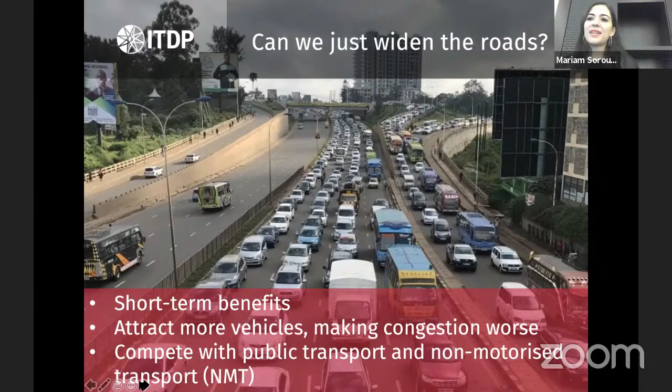First of all, it's all about road safety. There are 90,000 pedestrian and cyclist deaths in the Africa region alone. The cost of road crash fatalities and serious injuries are huge, representing around $128 billion. Can you imagine the amount of money that road safety is costing us? Of that, around $50 billion is attributed to poorly designed NMT facilities. So we would really save lots of money if we started investing in NMT.

Next, user expenses. Can you get back one slide?

We have found that the annual cost of cycling ranges between $200 to $400. By comparison, if you have a car, the driving expenses would cost you around $3,000 to almost $10,000. So the cost of having a cycle and investing in a cycle is really cheap compared to having a car.

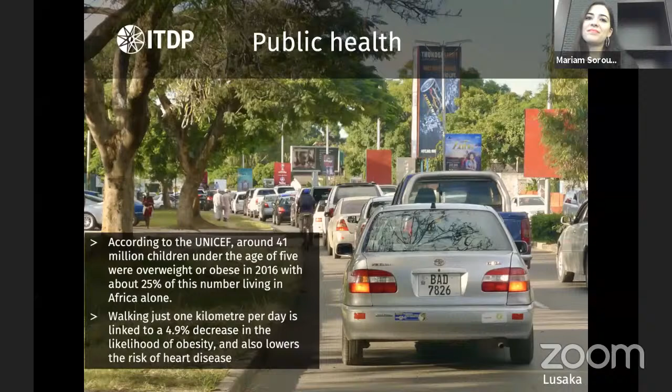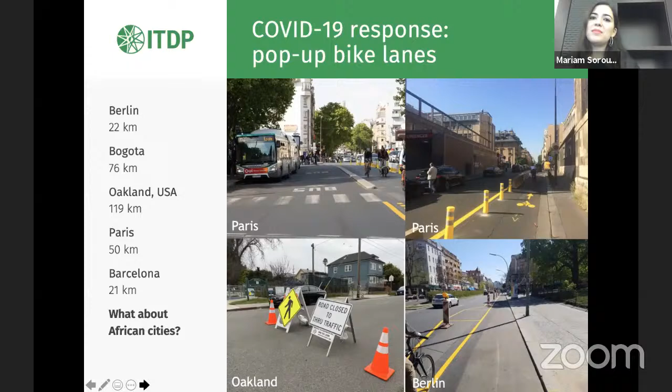We really need to start changing our thinking from giving cars a big portion of the street, and start thinking in a more equitable approach by providing other modes a good space in the street as well. Because we have seen that most cities depend on walking, and we need to encourage that.

So we really need to start moving in that direction in order to have a more equitable approach. After mentioning the reasons, we need to think of how to quantify the benefits across the continent.

So we have set up a model that compares travel patterns under the business-as-usual and sustainable scenarios. That model inputs information such as population, growth rates, city sizes, trip rates, and different modal splits to calculate the desired outputs. It has been calculating the investment a city would require over a 10-year span to achieve a sustainable transport scenario. The outputs I'll be discussing include fuel consumed, pollution generated, fatality rates, and the infrastructure needed. We have also used the UNEP and Center for Transport Studies Share the Road project assessment tool to calculate emission factors.

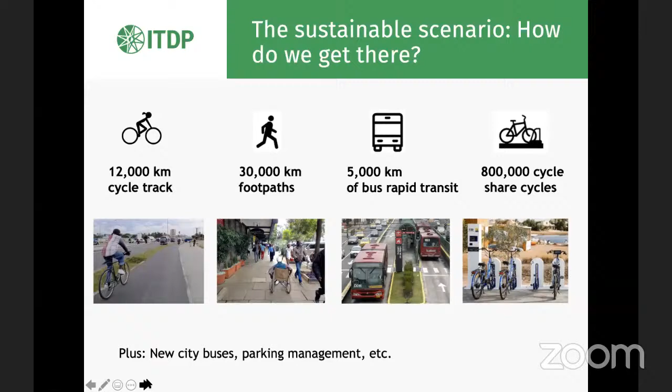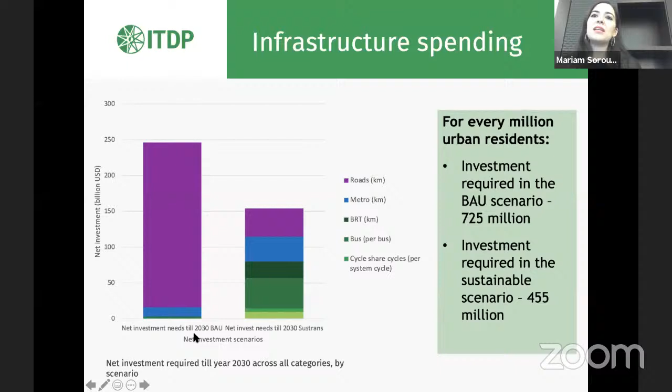That will also affect fuel spending, since we're reducing the number of cars and two-wheelers used. We found that from the BAU to the sustainable scenario, there's a 57% reduction in urban passenger transport fuel costs, evaluated at around $43 billion US.

About road crash fatalities: reducing vehicle kilometers of travel and increasing active walking and cycling modes with decent infrastructure might be anticipated to reduce road crash fatalities and injuries. From the BAU to the sustainable scenario, there's a 60% reduction in road fatalities by 2030, evaluated at around 45,000 per year.

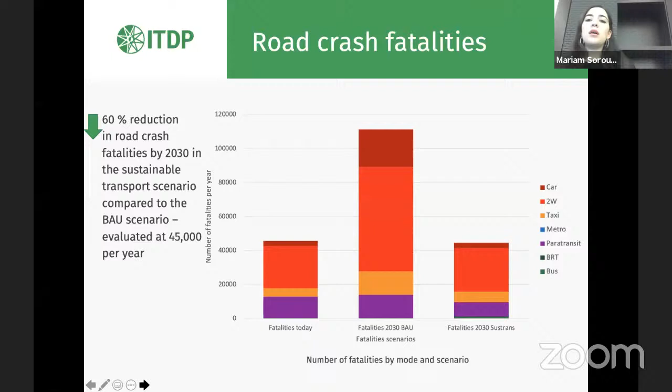We also looked at local air pollutants, the PM emissions. Exposure to these pollutants can cause severe environmental damage and is associated with increased risk of death from respiratory diseases. In the sustainable scenario, paratransit dominates PM emissions. However, if we start using modernized buses with cleaner diesel, Euro 3 or higher, or electric vehicles, PM emissions would go even lower in the sustainable scenario.

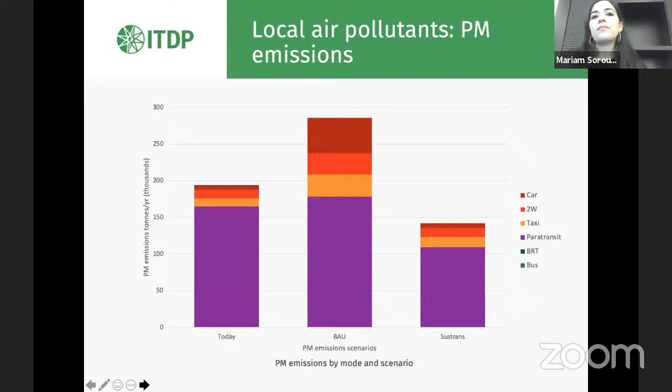In fact, many African cities now have live demonstrations of actions they have taken in order to promote walking and cycling. I'm going to show you a few examples that we need to learn from and build on.

For instance, in Dar es Salaam, in the BRT corridor, they haven't done only a bus rapid transit system, but they reformed the full street, adding cycle tracks and decent footpaths, with wide and spacious walkways that have improved walkability.

As the minister has said, Addis Ababa has recently launched their NMT strategy, planning to build 600 kilometers of new footpath and 200 kilometers of dedicated cycle facilities over 10 years, which I believe is a great strategy that we should all learn from, because this is what we really should be thinking of over the coming 10 years.

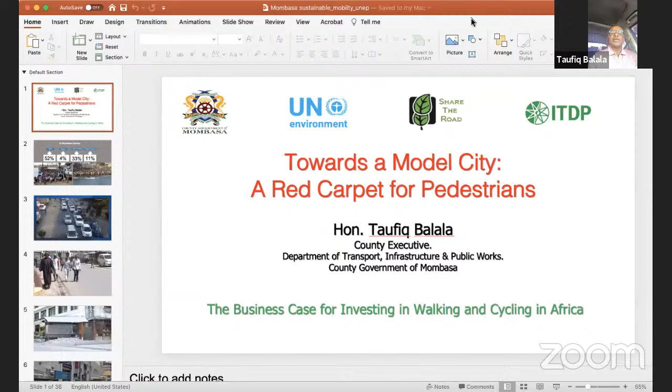Sure. So Mombasa basically is a city with a population of slightly over 1 million people. In Mombasa, we have 52% of the citizens who walk. They go about their affairs during the whole day just walking. They never use any sort of motorized mode of transport. They use their feet to move from point A to point B.

We have 11% who use private transport, of which only 3% own those private transportation, and 33% of the population use public transport. We have only 4% who use cycling as a mode of transport. Obviously, the 4% is very small because we don't have corridors for cycling. The way Mombasa was designed over the years was just for cars.

We also recently only started putting a lot of importance on the walkways, because in the past we never saw the importance of walking, but only started recently. I stumbled upon a report by the World Bank that was done some years back, and we saw sense in the study that was done.

Now, when we first decided to embark on building the footpaths, we had many challenges over the years. A lot of the footpaths were broken and made into parking spaces for private vehicles. A lot of the outdoor advertisement furniture was also placed on the footpaths. The Kenya Power and Lighting Company also put their electricity poles on the footpaths, and we ended up not having footpaths at all. So people were walking on the road and sharing the same road with the vehicles.

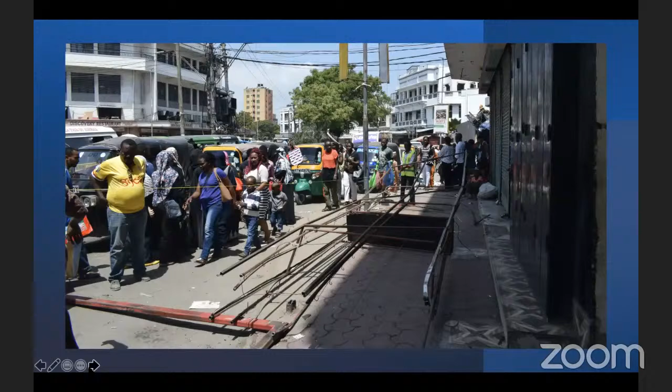So we did it slowly, and we started with the CBD just to showcase the importance of the footpaths. And the public started seeing the importance of the footpaths, and then also we had to widen them to at least 5 meters wide.

Initially, they were about 1.5 to 2 meters wide. But you know, when you walk with a group of friends, you end up walking in a single file because the footpaths were very narrow.

So to get the 5 meters, we had to eat up on some roads, and also eat up on many parking spaces. This brought us a lot of problems from the selfish percentage who have private cars.

And of course, you know that these guys are very influential, so we had a lot of problems. In fact, I survived an impeachment in the assembly just because of things like that, disrupting and doing away with hundreds of parking spaces to create the footpaths.

But slowly but surely, a lot of people started seeing the sense, and it's becoming better than it was.

On the cycling side, we have a problem because the roads were not designed to give that extra lane for a cycling lane. So right now, we're working with ITDP to identify where we can get a cycling corridor, and we've identified a few streets where we can start as our model.

But eventually we might have to change some streets from two-way to one-way so that we can have the cycling lane, with all the cars going in one direction and one huge ring road maybe around the island of Mombasa. That way we'll be able to have space to get that extra lane. Thank you.

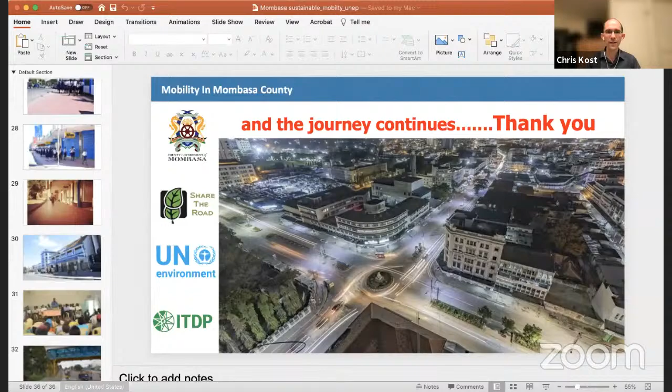And with that, I want to introduce our second panelist, Catalina Ochoa. She's a senior transport specialist at the World Bank. And the question I want to pose to Catalina is...

Yeah. Yeah. Thanks so much, Taufiq.

As Taufiq was saying, traditionally the metric for measuring progress on transport infrastructure is the number of kilometers of roads built. And traditionally, when it comes to development bank investments, it's easy to make the case when you're building a new road. When you do the cost-benefit analysis, you look at how much the cars will be sped up, and it's easy to do that travel time estimate and make the case for a road widening.

So we were curious to hear from you: how is the World Bank going about broadening the set of criteria that go into deciding whether you'll make a certain investment? Is it just based on travel time savings for private vehicles, or are there other factors we should consider now? So over to you, Catalina.

Thanks. Thanks so much, Chris. I stopped my video because I'm on a hotspot, so I apologize for that. No problem, I think it's better this way so you can hear me.

Do you want me to address the question or go into my presentation? Happy either way. No, feel free to go into the presentation. Okay, but I'm also happy to answer that question, it's a really good question. So let me see, let me know if you see my slides. Yep, now it's there, thanks.

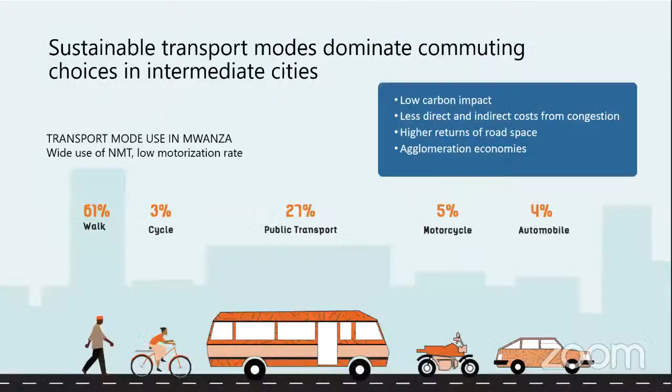So that's a very important finding, if people would use cycling infrastructure, if there was cycling infrastructure. And then finally, another analysis I wanted to point out was a road space allocation analysis that we have in our report.

In which we assess from the distribution of space perspective how some modes are favored over others. We used satellite imagery to look at all the intermediate cities in Tanzania. At the downtowns, we classified the space and whether it was used for pedestrians, for cars, for parking, etc. We found that valuable public space in central areas is allocated to parking, which, as we know, has very low social return on investment and benefits comparatively very few road users.

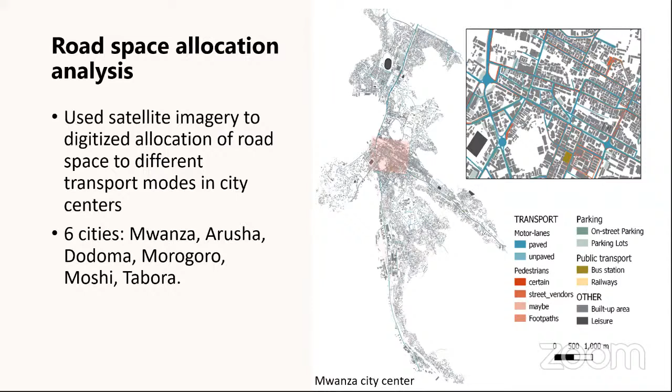So, for instance, this analysis shows that in cities like Arusha, parking can take up to 50% of the road space, and actually 50 to 70% of the sidewalks in the downtowns we looked at were used for parking. So again, it's also about looking not only at the fairness in the distribution of resources, but also the fairness of the allocation of public space.

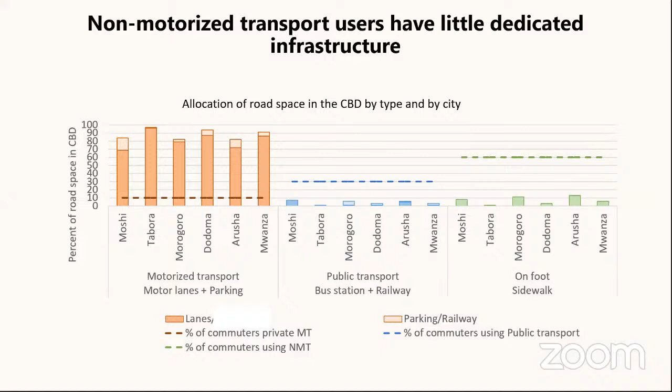So this is to say that the business case is clear. Non-motorized transport is the most cost-effective way to increase accessibility and slow down automobile dependency, because this is the cycle we're looking at: cities that experience congestion build their way out of it with roads, which prompts urban development along these roads, which encourages sprawl.

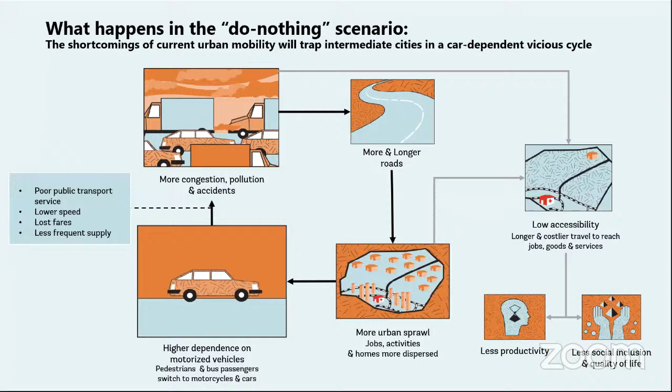People who live in this urban periphery are too far to walk. Then this increases the demand for motorized transport, and as a result cities have lower accessibility, which hinders their potential. And as a result, many Tanzanians, and I think this applies to other African cities, will be left behind, unable to afford public transport and living far from opportunities.

So I'll stop here. I hope this contributes to the discussion on the business case, and happy to provide more details on our study. I'll stop here. Thank you.

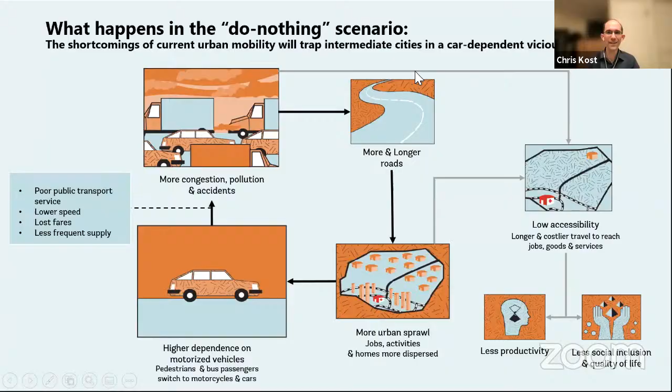Great, thanks so much, Catalina. That's a very emphatic case for changing the way that we invest. And I find that point about road space allocation very poignant. I think that's true in a lot of our cities, that in many cases we have good footpaths, but we let cars park all over them. And so it represents a really wasted investment, and it's really a poor allocation of that valuable space in the downtown areas.

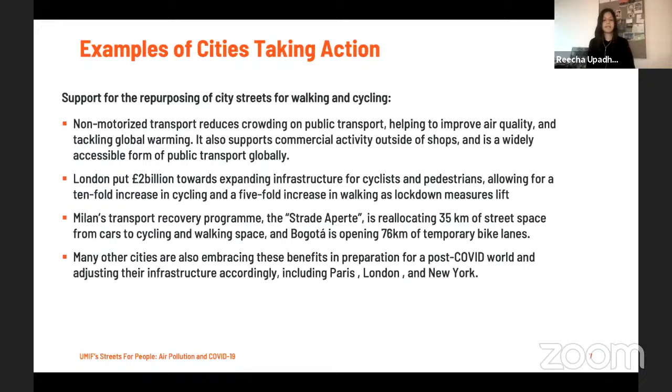And I believe that can only happen when cities start to see other cities going down that path and understanding and adopting solutions that are transferable and scalable. So let me stop there.

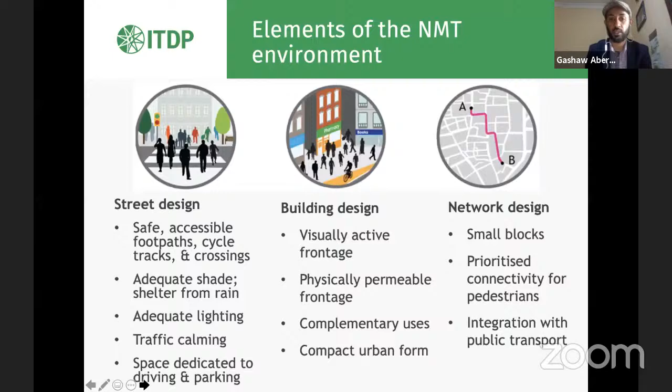Just to give background on the country's urbanization: Ethiopia is one of the least urbanized countries in the world, but recently it's rapidly urbanizing. The level of urbanization is currently around 21%, with a total population of around 100 million, and we expect a rise in urban population in coming years, mainly due to migration and other related activities.

Let's take you quickly through some of the existing assessment. As I mentioned, much has been said by our minister, Her Excellency, so I won't repeat it, and we can just look at some of the cities and their NMT environments.

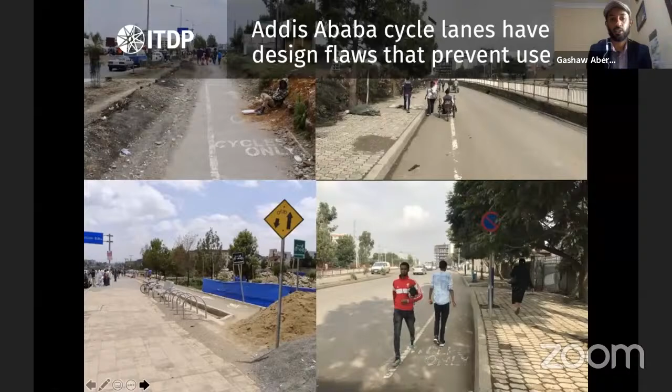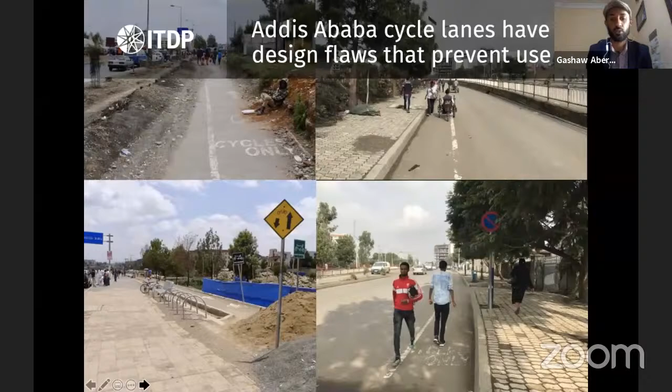Before the preparation of the NMT strategy, there were some attempts by the city administration to provide cycle lanes in the city. These cycle lanes were done previously, but due to design issues and also proper management coupled with different operation issues, these corridors have not been utilized as intended. This was some years back, around 2014-15. The city was trying to provide a dedicated cycle lane, but as you can see, they were not completely dedicated. They used markings instead of providing protection for the cycle lane. This is something we need to consider to have better cycle lanes in the future.

To summarize all these issues, we classify them under three major categories: infrastructure related issues, street management, and having a cycling culture in your city.

The infrastructure and design issues included inadequate footpath coverage, as you can see in some of the pictures, unsafe pedestrian crossings at most intersections in the city, and no dedicated cycle facilities in most parts of the cities.

For street management, we lack parking management, and street vendors, even though there were good examples in some regions, are a huge challenge in Addis and other big cities, where they occupy most of the walkways. Related to cycle culture, there is still socioeconomic stigma, and especially for females, the acceptance of riding bikes still needs a lot of work.

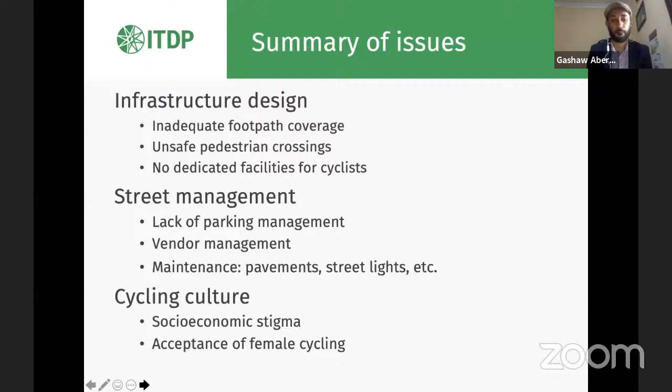So what does this NMT strategy stand for, and what is its content? This has already been mentioned by Her Excellency, but to go through some of the major goals: to increase the modal share of walking, cycling, and public transport—the active modes—and to reduce personal motor vehicle use. Another goal is to improve road safety, since Ethiopia is well known around the world for having the highest level of road fatalities and accidents compared to other African regions. This could be a solution to improve road safety, as well as improve air quality, which has also been discussed in previous presentations.

So we try to do this, and in order to measure progress, we have measurable targets that align with national and international goals.

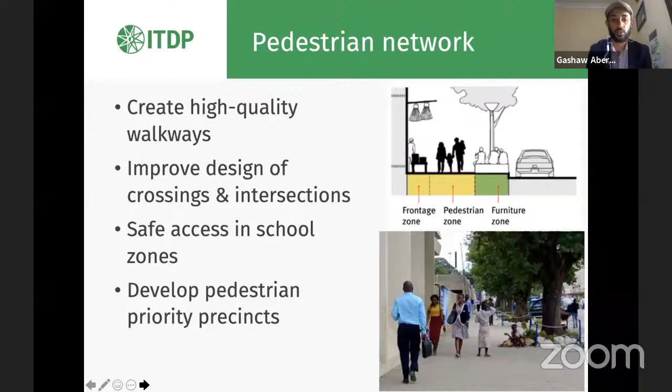The strategy doesn't only talk about existing assessments and proposals for kilometers of cycle lanes, roadways, or intersections, but also tries to show how we should design our pedestrian networks. You need clear different zones—pedestrians need a clear zone, and the frontage could be used for vendors, which will contribute to the economy of the city and country at large. There also needs to be a furniture zone that will give shade to pedestrians.

The other one, currently being practiced in Addis Ababa's road designs, is incorporating cycle facilities. This was also recommended under the strategy, and much has been improved, especially in Addis Ababa city, where we need certain space dedicated from the road portion to these dedicated cycle lanes.

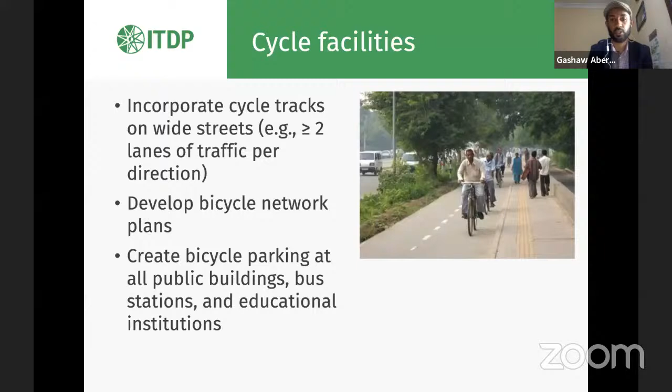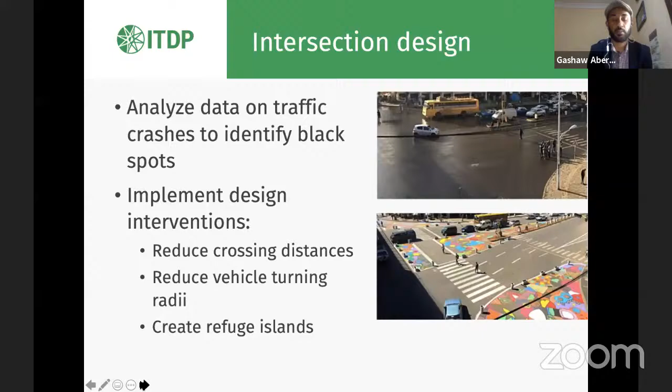Intersection-wise, there have been many intersection improvements in Addis Ababa done by the Addis Ababa Traffic Management Agency in collaboration with the Road Authority, using different analyses to find high traffic accident spots. They identified those areas and put several interventions to find permanent solutions by tightening curves, reducing crossing distance, and adding refuge islands, where there has now been much improvement regarding road safety.

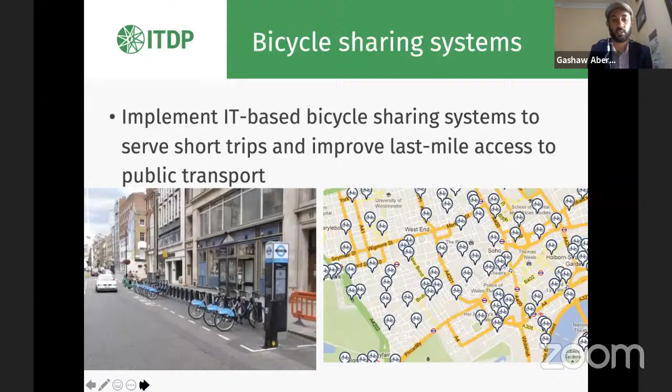The other issue was the bike sharing system. This is under the Addis Ababa Transport Bureau, which is doing a feasibility study to implement an IT-based bike sharing system in the capital city. This is expected to improve the last mile access to public transport that the city is implementing.

At a national level, it's not only Addis Ababa that has been addressed in this NMT strategy, but also secondary cities. The strategy has proposed prioritization in cities' investments regarding the money we spend on transportation facilities, and guidance to prepare a set of minimum standards to work with consultants. Cities need to do sustainable urban mobility studies, especially those with a population of 300,000 and more residents.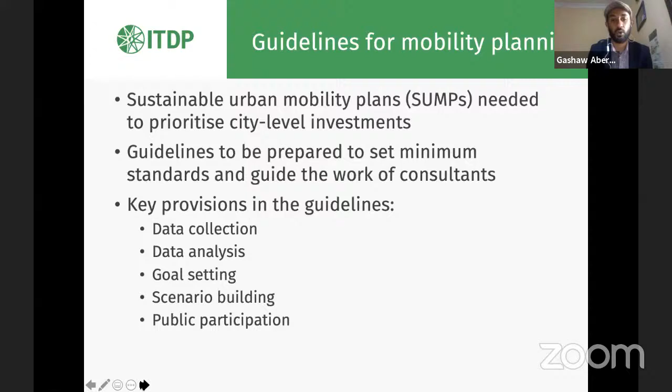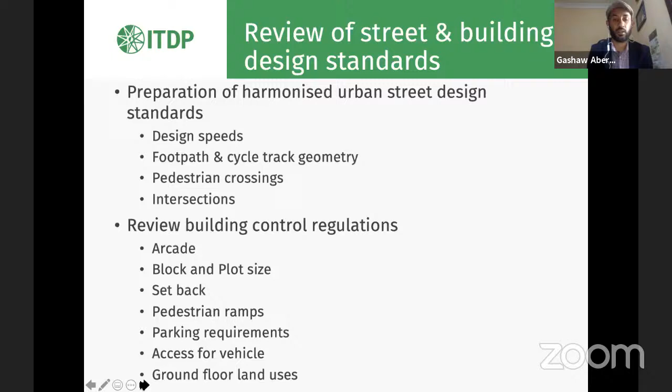Most of these problems, especially related to street design and building design, could be solved by improving our existing street design manuals and building design manuals. Currently the ministry, as Her Excellency mentioned, is trying to improve design standards and is working on harmonized urban street design manuals, which will improve speed, footpaths, cycling zones, pedestrian crossings, and intersections—these will be given major attention. Building control regulations also need to be improved in the future to improve walkability.

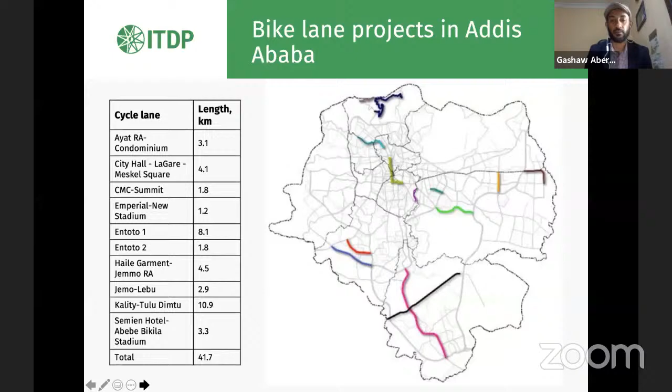This is one of them, from Jemo to Lebu. This is also the first pilot cycle corridor, constructed by the Addis Ababa Transport Bureau and the traffic management agency in collaboration with partners.

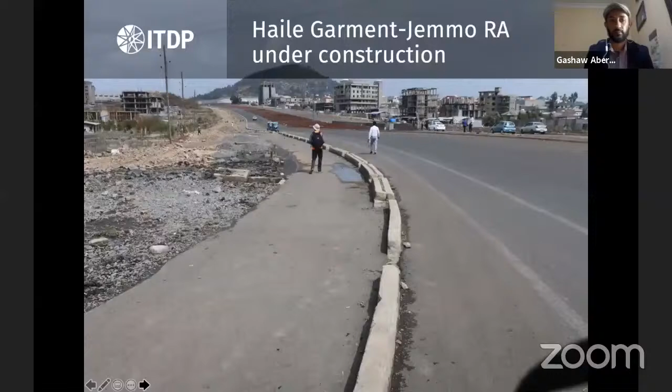Another new ongoing project, as shown in one of those maps, is a new road construction project on the outskirts of Addis, which includes dedicated cycle lanes along the corridor.

It's still under construction. Regarding bike sharing, the city has already prepared a bike sharing feasibility study, and for the first phase they identified station locations by classifying them into three groups: smaller, medium, and larger bike sharing stations. They are expecting to have at least 500 bike cycles operating in the first phase.

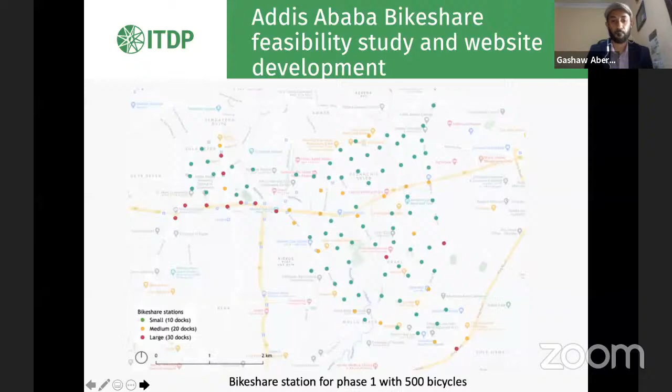Together with ITDP and UN Habitat, the city is also developing a website so people can recommend locations for stations and appropriate corridors for bike sharing. That will also be launched once it's finished.

The other area is intersection improvement. These are some of the intersections that have been done by the Traffic Management Agency and the Addis Ababa Road Authority. As you can see in the pictures, this is one of the major intersections in the city, where there are many pedestrians and collisions between vehicular traffic and pedestrians. The city initially did temporary intersection improvements and now has done permanent ones, so pedestrians have a lot of space to walk, the crossing distances are much narrower, and I'm sure the road safety issue has also been solved.

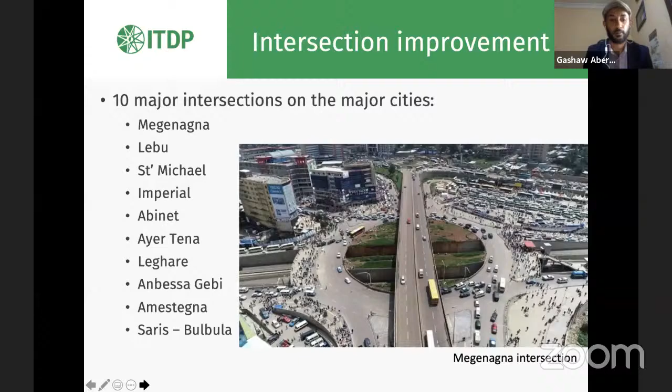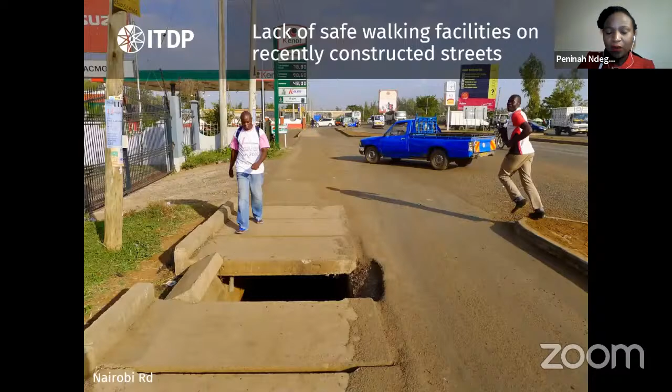But in terms of infrastructure investment, it doesn't match up. We have very good carriageways, but very limited infrastructure for walking and cycling. This is how the city used to look like. At least it's improving, and I'll share some photos. We had major wide streets that were very unsafe for children crossing the road, increasing their risk of accident.

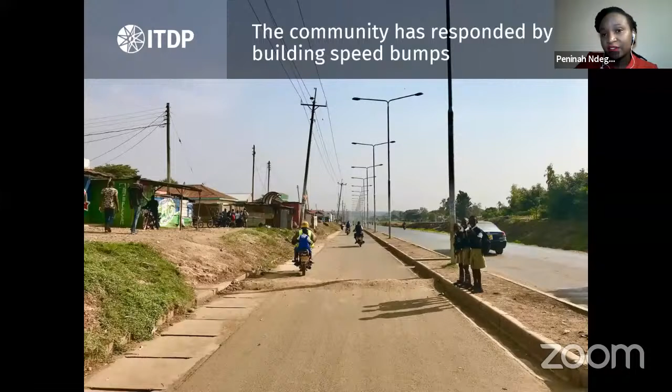Going back to how communities are making interventions, they used to do their own DIY bumps to calm the traffic. It kind of works, but it shows that the community understands and puts safety as a key priority. Because if your child could die going to school, why would you let them walk anyway? It's very important to ensure safety on our roads.

Looking at cycling, similarly, we still don't have very good infrastructure, despite having cycle bodas operating in the city. So cyclists are pushed onto the road, mixing with private cars and matatus. In the process, we have a lot of accidents involving cyclists.

So Kisumu decided to change the status quo. The mission for the Kisumu Sustainable Mobility Plan is to provide efficient, affordable, equitable, safe and convenient mobility for all. Safety is paramount, because we know we don't want to lose anybody.

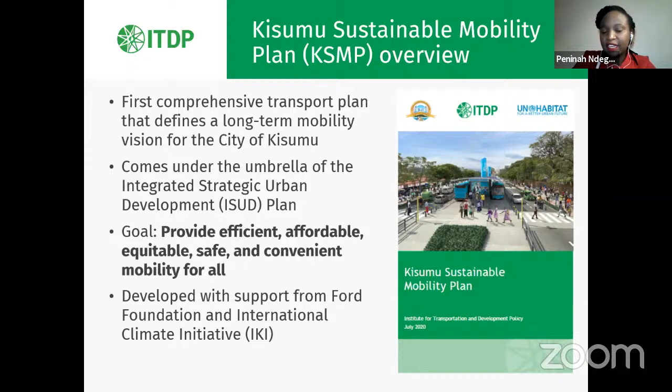One life is very much important, because most accidents happen to people of prime age, between 15 to 45 - working people and school-going children. So we needed to ensure that whatever we promote in this mobility plan, safety was paramount. Equitability meant that everyone is catered for, not compromising the NMT users.

The Kisumu Sustainable Mobility Plan was launched earlier this year by His Excellency the Governor. It's already adopted for implementation, and we're happy to say implementation is already happening.

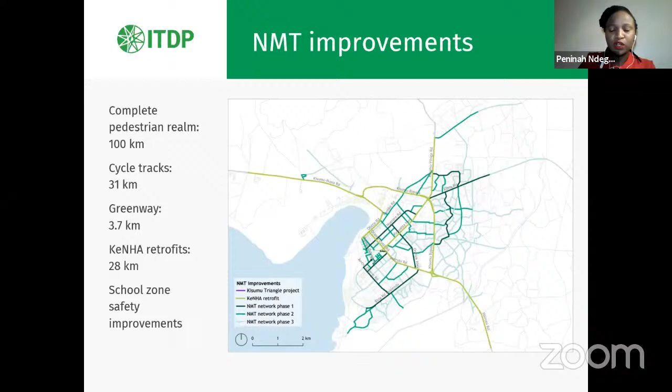Some proposals in the Kisumu Sustainable Mobility Plan ensure quality walking facilities. We propose at least 100 kilometers of footpaths across the city, as shown in the map. We want safe school zones so children can get to school safely, and to ensure that even major highways owned by the national government, like KeNHA, retrofit NMT or walking infrastructure in their improvements.

Another important aspect of the proposal we're still working with the city to improve is crossings. We have several pedestrian crossings across the city, called tabletop crossings. They're elevated and universally accessible, elevating pedestrians while also acting as a traffic calming measure, which improves a lot of safety in the streets.

These are the school zones, which we propose to have safety enhanced, to ensure our school-going children are able to get there safely.

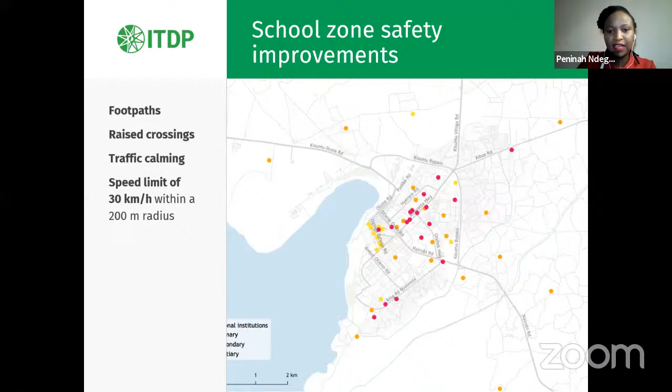And maybe just to talk about something that is very important in making the business case for walking and cycling: there must be interaction between the NMT infrastructure and the buildings, specifically walking, because more people on foot means more people for business. But we have to ensure that the buildings themselves are able to connect with the pedestrians walking.

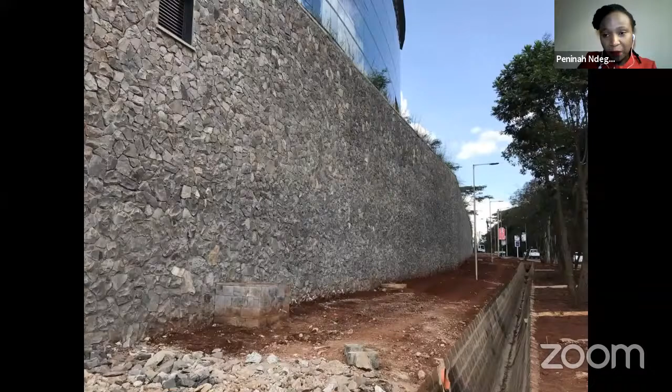So again, we have massive compound walls, and the more compound walls we have, the less integrated connectivity there is. It becomes very insecure to walk around such areas, because nobody is watching over you, and pedestrian safety and security is paramount.

And again, like I said, if you don't allow people to interact with the building, then people cannot see the businesses that are inside.

Another important aspect to avoid when designing NMT and connecting with buildings is a lot of high-level parking, like we see a lot in Nairobi, where the first floors are occupied by parking. Again, you're putting the people in the buildings higher above the pedestrians, so it doesn't make a good case even for the businesses, because fewer people get inside to purchase something.

At the same time, it doesn't make it attractive to walk in such a neighborhood, because safety and security again is hard. Because if you're being mugged while walking along here, before these people see or come down to help you, you're on your own, you know?

So those are just some of the things. We need to ensure that we have visually active frontages, overlooking windows, so people can walk around and see what's happening inside the building. Most importantly, we have to have physically permeable frontages, with multiple doors and accesses so that one is able to connect with the businesses. This is how you maximize profitability for businesses along the NMT corridors.

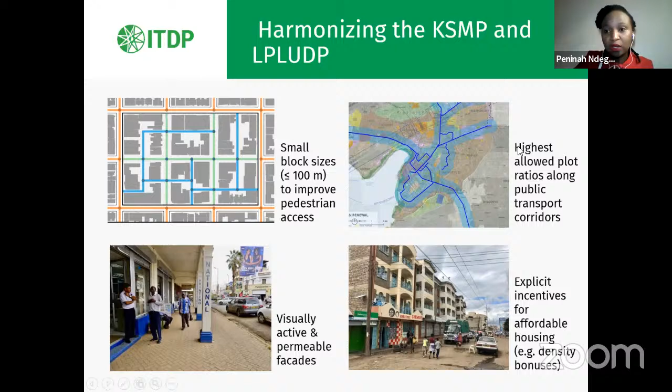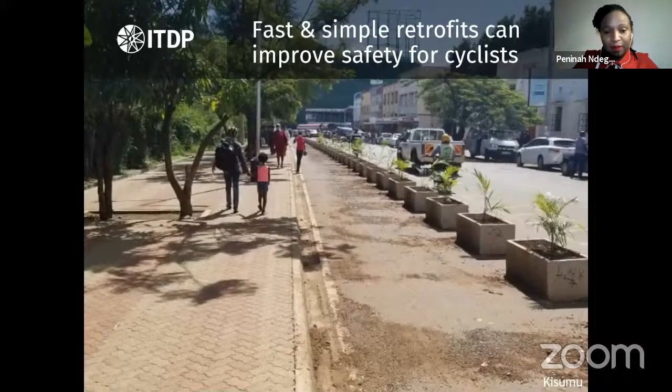NMT infrastructure doesn't have to be expensive. Simple retrofits can work. This was just a temporary thing, but it was removed, and it does not exist at the moment. But you can see with simple flower pots, you can provide a safe and secure cycle network across the city without necessarily building an extra one.

Expanding on this, providing NMT infrastructure is not just good for health, climate change, air quality, and reduction of accidents, but it can also improve aspects of the businesses, like property values on that side, and also for the cities, because parking is also an issue. We have to balance parking generating revenue and it being a source of investment for NMT infrastructure. So cities need to invest in proper parking management systems, and Kisumu is actually in the process.